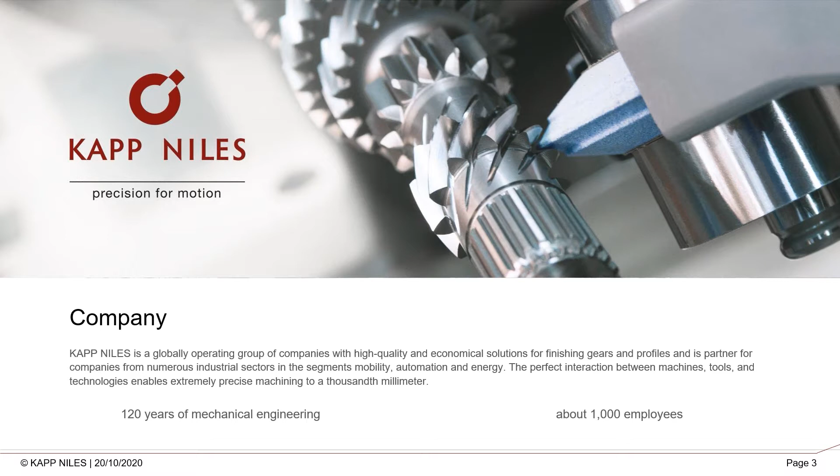KAPP NILES is headquartered in Coburg, Germany, with a plant for the machines and a separate plant for CBN tools and dressers. There is another plant in Berlin for machines. We have a third plant at Grossostheim for the measuring machines. We have subsidiaries all over the world, with the latest being KAPP NILES India Technologies in Bangalore, with our offices in Pune and Delhi as of now.

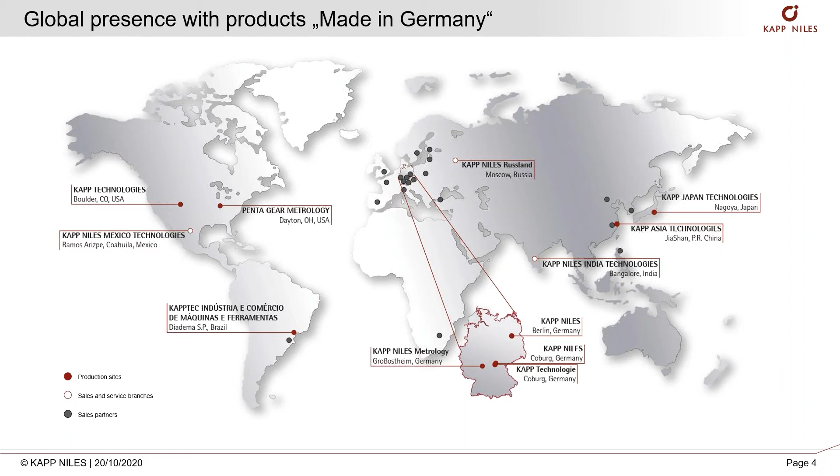We will now move on to the sectors that KAPP NILES caters to, and over the next 2-3 slides we will cover the types of components, which will give you an idea of the variety, the range, and flexibility of our machines.

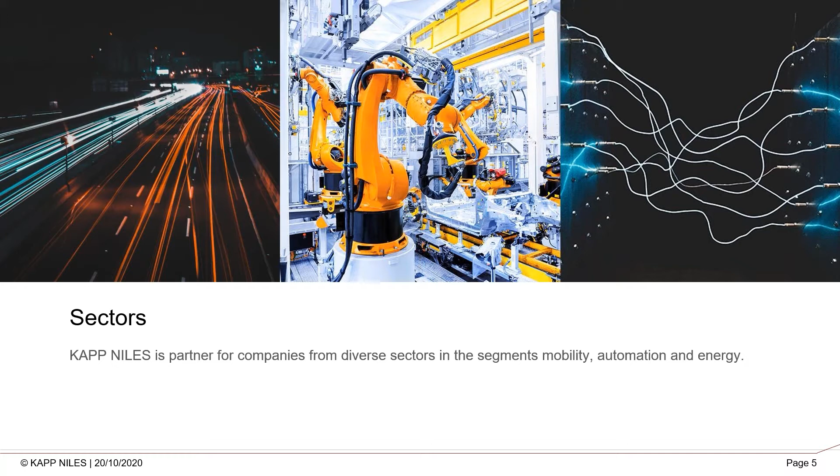The mobility sector clearly shows our strengths in automotive, aviation, and shipping. A few examples showcased here include gear shafts, ring gears, double wheels, and pump rotors in the automotive sector, while we have sector gears, triple pinions, input shafts, and double helical gears under aviation and shipping. Basically, anything cylindrical gear or profile part that requires grinding is almost possible on our machines.

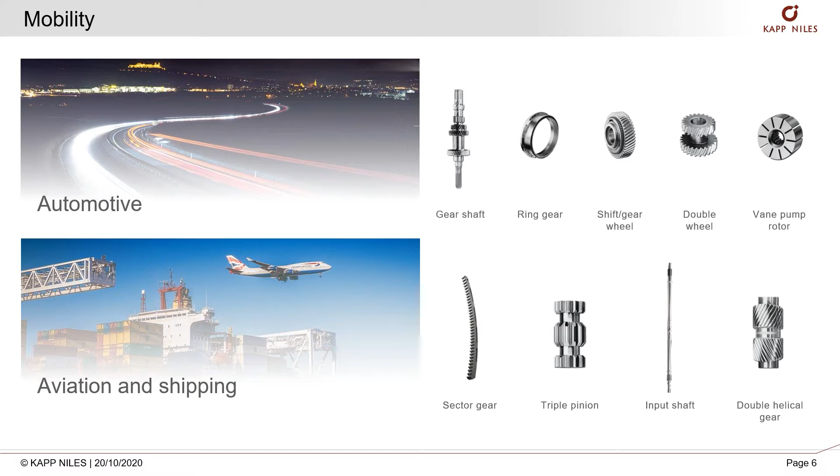Flexibility being our focus, we cater to parts like cycloidal discs and ring gears housing for robotics, and all kinds of gears, worms, and drive wheels for conveyor systems and industrial gearboxes.

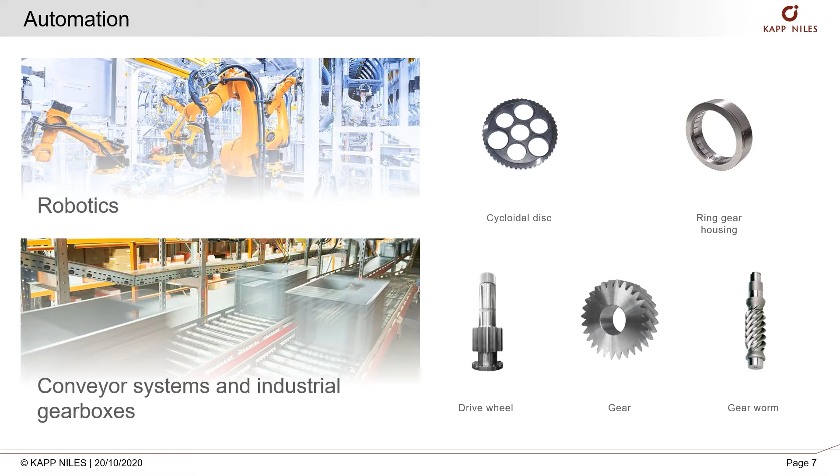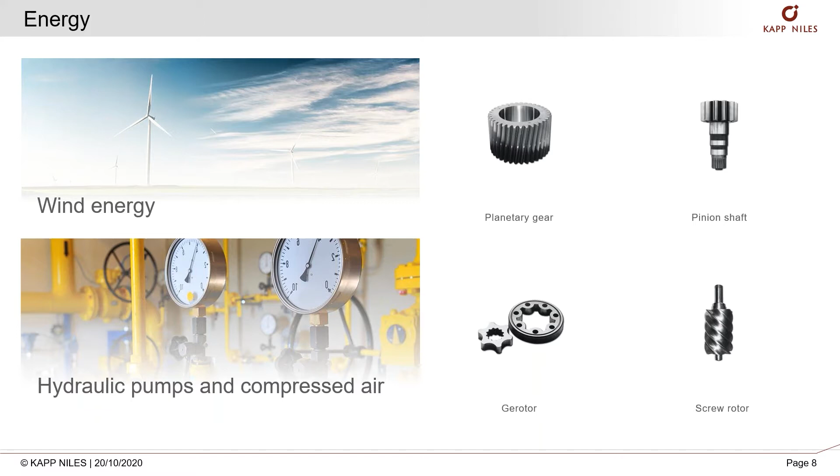We don't just stay small, we go big as well. Wind energy is a very interesting sector for us, with planetary gears and pinion shafts. Besides that, in hydraulic pumps and compressed air sectors, we do gerotors and screw rotors, to name a few. As you can see, we are not limited in any sector, be it external or internal. We grind the parts wherever possible.

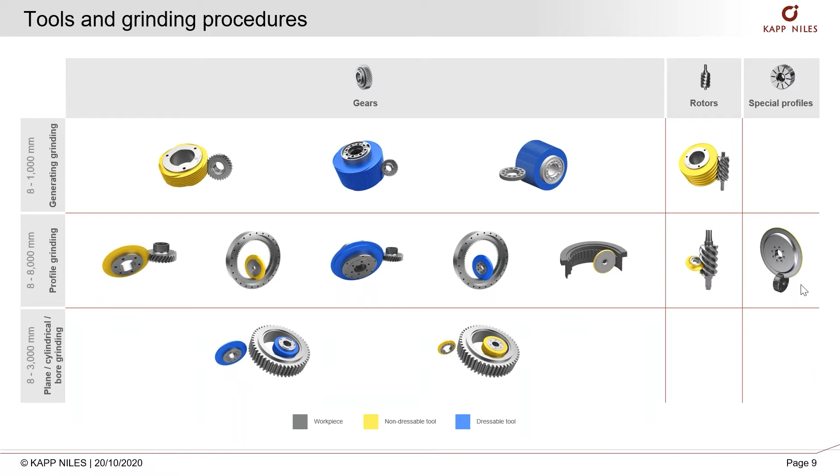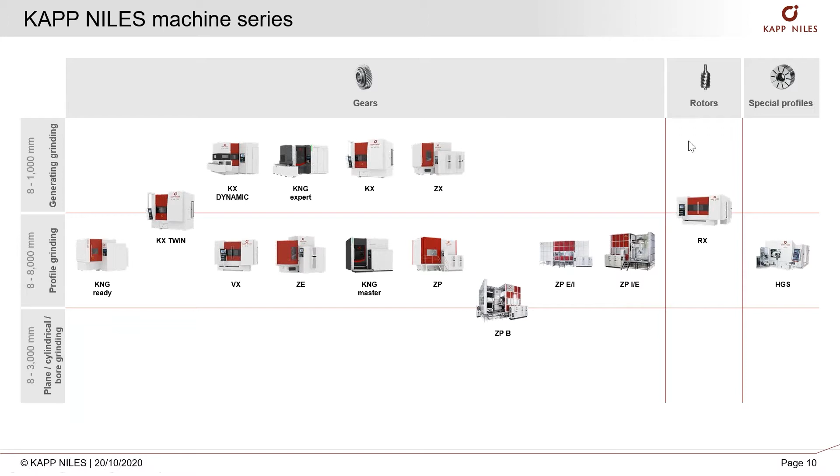We cover all the ranges as explained, right from generating grinding up to 1 meter diameter, profile grinding up to 8 meters, and special plane cylindrical or bore grinding up to 3 meters. All our machines can take CBN and worm wheels. This is just an overview which covers all our ranges of machines.

All the tools you see on this page are manufactured by KAPP in-house. This includes also rotor grinding and special tools. This is a big advantage for us as we are able to control the process completely, and due to our experience in the field, we are able to achieve the high tolerances required in the industries.

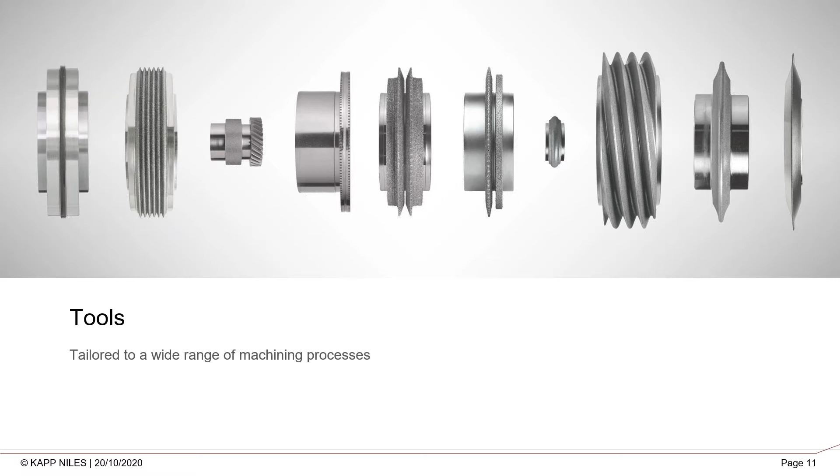This slide shows you the different types of grinding tools and dressing tools we have in our program. The gear honing machine is not part of our program, but the tools we make are supplied to customers for this type of application. We have both the dressable and non-dressable grinding tools as well.

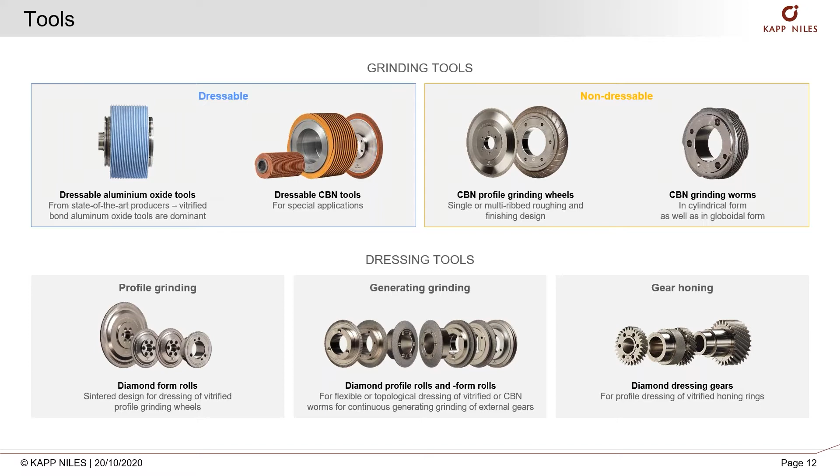We will now talk briefly about topological generating grinding, which is gaining a lot of focus of late and also being widely used in the electric vehicle markets.

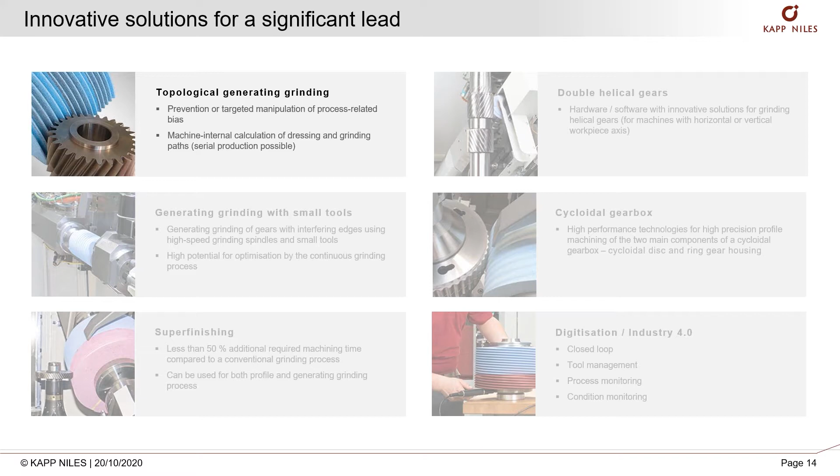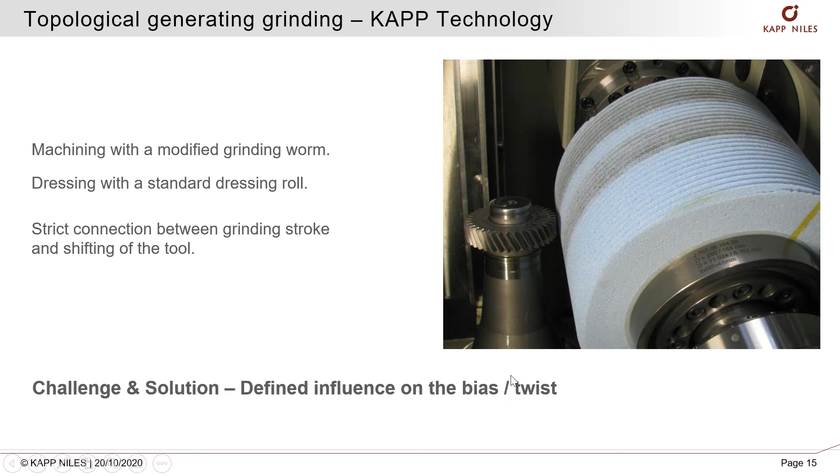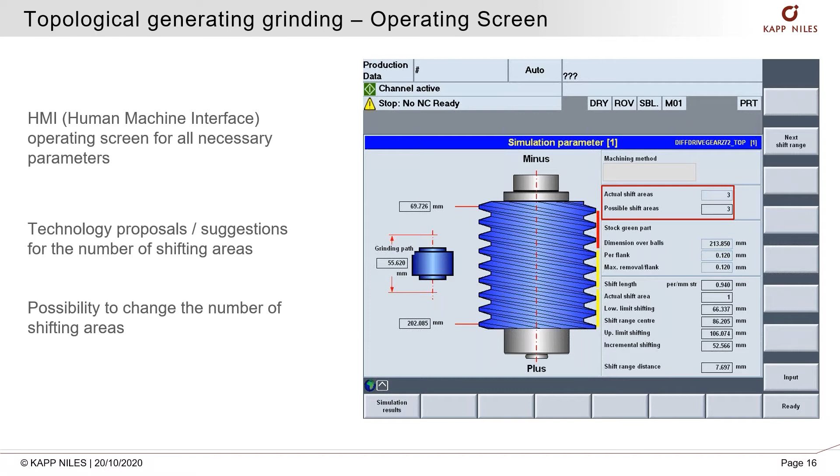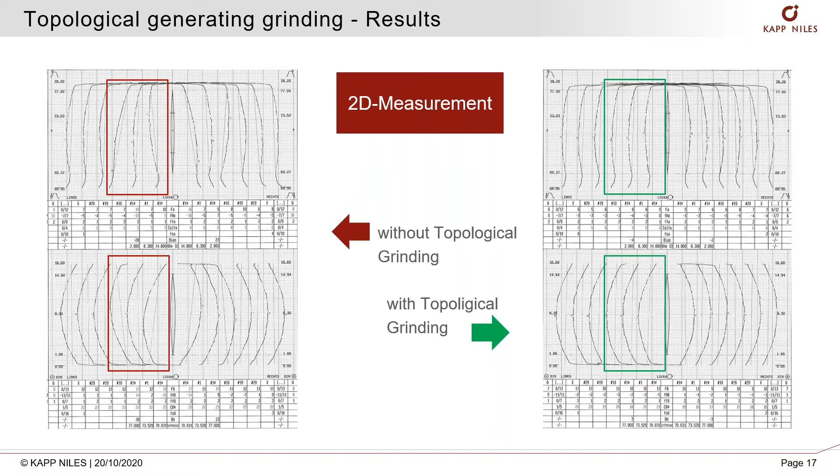Moving on to generating grinding with small tools. This specifically requires high-speed grinding spindles, especially critical when it comes to two interfering gears on the same shaft, for example cluster gears. The next few slides I will discuss this in more detail.

Here are some examples of the small tools which we use on our machines where we do generating grinding. Spindle speeds of 23,000 RPM. We have automatic balancing on them, and changeable tool holders with the same interface. These workpieces are available on certain models of our machine doing generating grinding.

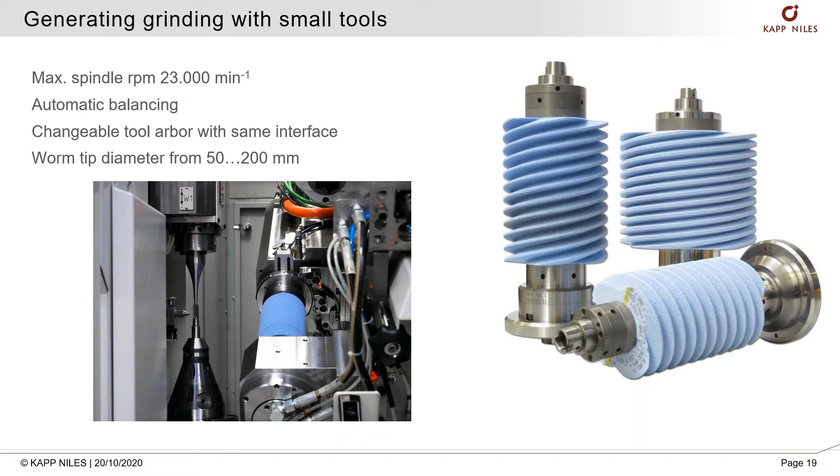Here is an example of a cluster gear. We use a bigger wheel for the bigger part and a smaller wheel for the smaller part, but not in the same clamping.

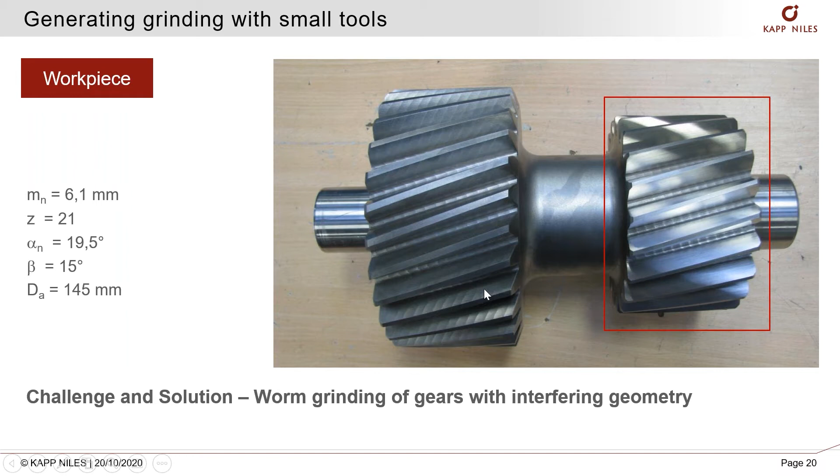The tool used here is a 30% SG wheel of 150mm diameter with 4 starts. For the bigger gear diameter, we use a standard 280mm wheel, whereas when we come down to the smaller gear, we have to change over to a 150mm diameter. This way we do not risk any collision between the two gears with a bigger wheel. Secondly, with a bigger wheel trying to do the smaller gear, we have to do profile grinding, whereas with a smaller wheel we're able to do generating grinding.

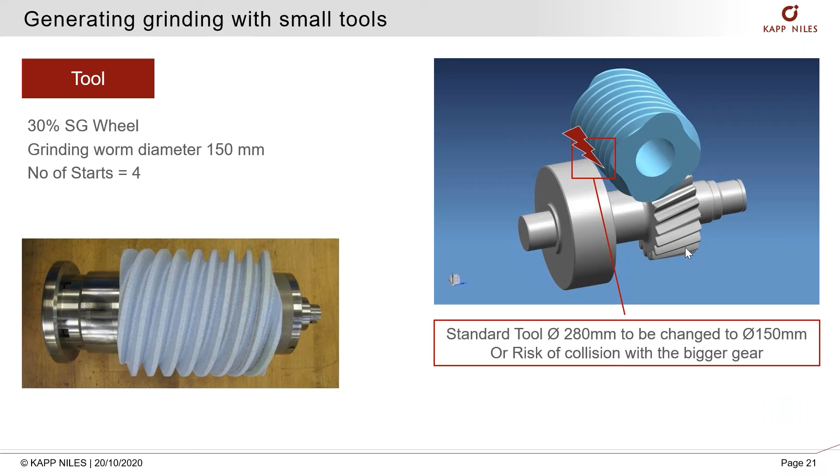Here you can see the setup with a smaller wheel. The former technology of using non-dressable profile CBN grinding wheels, with a grinding time of approximately 5.4 minutes, is now replaced with a smaller dressable worm wheel with grinding times of approximately 2.9 minutes. So from this you will see that we are able to achieve approximately 46% higher productivity with generating grinding, with no longer profile grinding required. This is a big benefit, especially for such types of components.

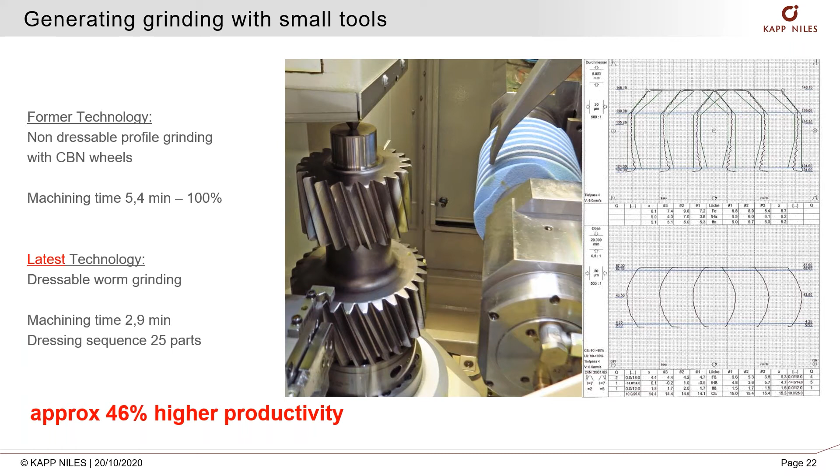We will now talk a little bit about superfinishing in the grinding process for both generating and profile grinding. The wheel, as you see here, is a sandwich wheel. The yellow marked area is the grinding area, and the red marked area is the superfinishing area. In other words, the blue wheel is the grinding wheel and the pink wheel is the superfinishing wheel, which are sandwiched together. The requirement of such a setup is specifically for high surface quality achievements, for example, as we say here, Ra less than 0.1.

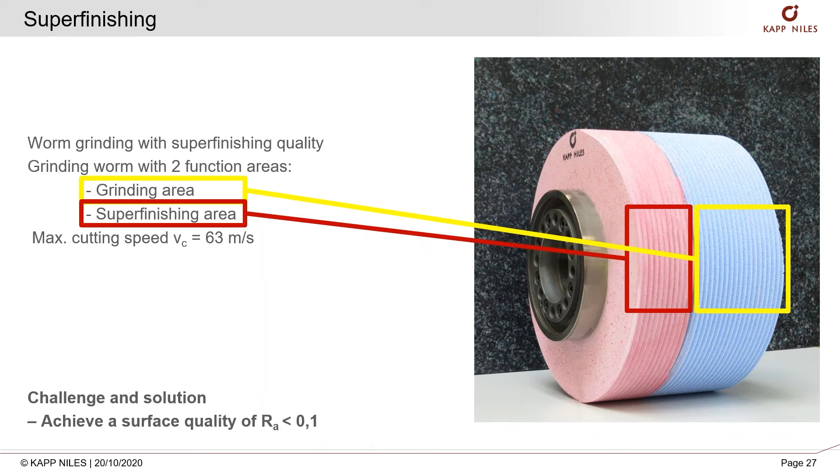Let me show you the difference between the same gear. On the right side we have the part after grinding, and on the left side here we have it after superfinishing.

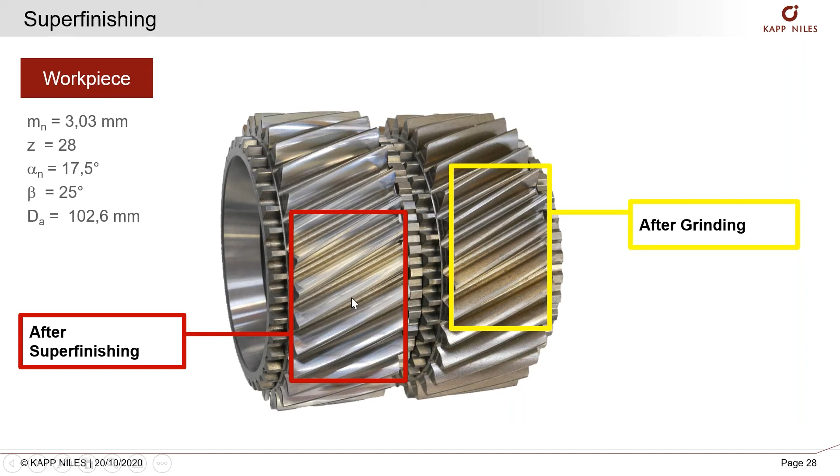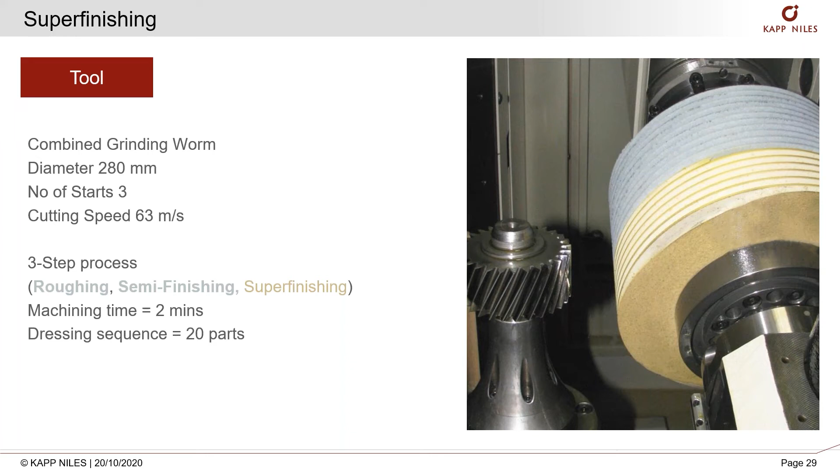Here the measurement sheet shows you the accuracies that we are achieving. On the left side, before superfinishing, and on the right side, marked in green, after superfinishing.

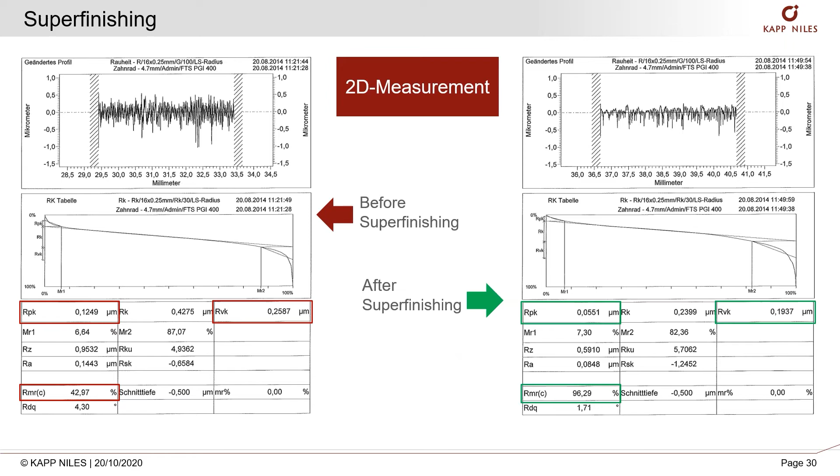Over the next slides I'm just going to run you through some examples because we are running a little bit into a time factor also. So we'll just show you a few slides about double helical gears, that these are also possible on our machines - the grinding of both lead directions in one process.

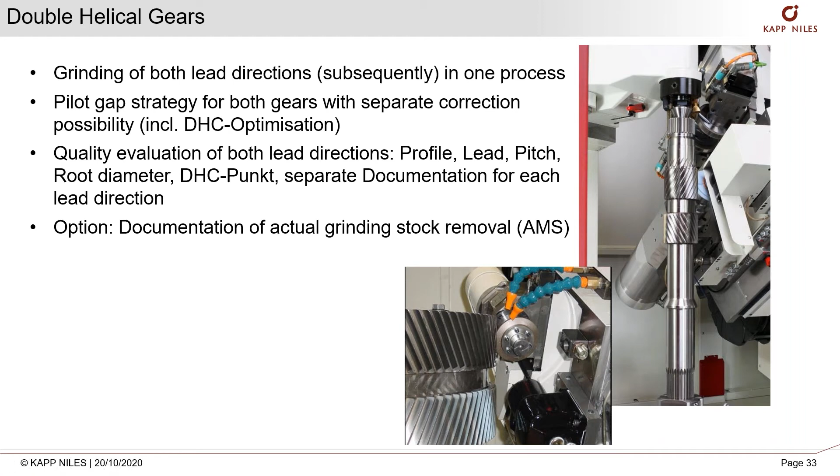As you can see here, for this we do have special software aligning the gear to accommodate the apex point. We distribute the stock across all points, and all gear points are ground within the required limits. We have the option of filling in the minimum and maximal stocks, and considering the grinding stock and apex point, this is very critical, especially for aviation type parts.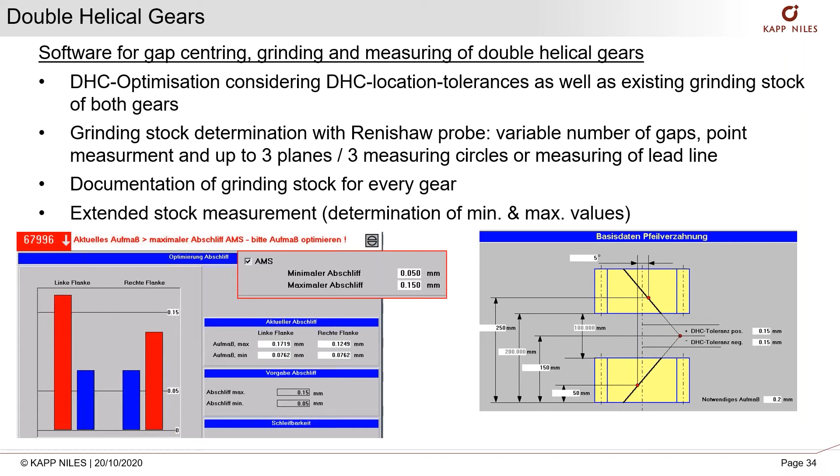Some other options we offer are planetary gears, where we are able to do cylindrical or tapered bores, faces, external diameters, internals - this is all the flexibility of our machines.

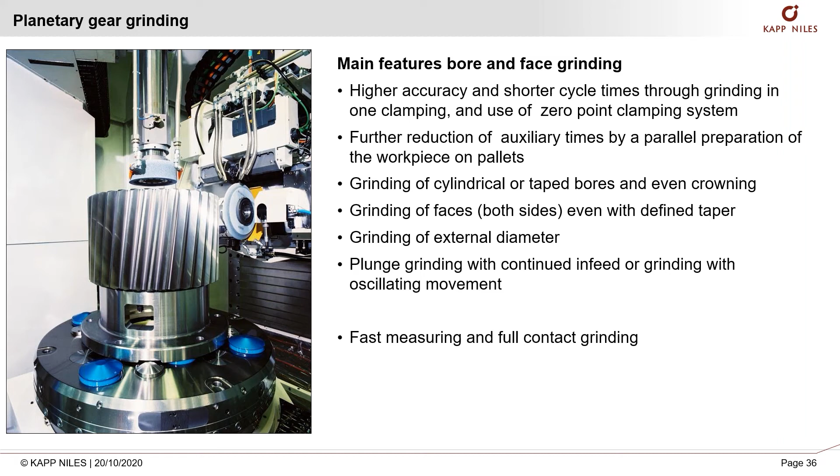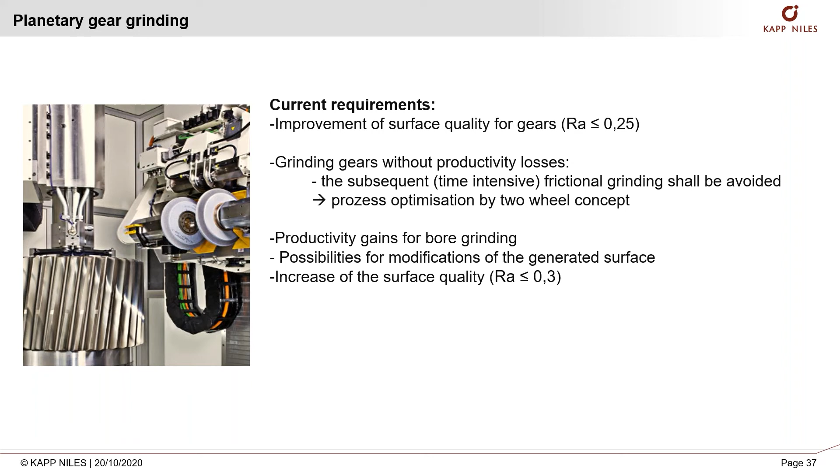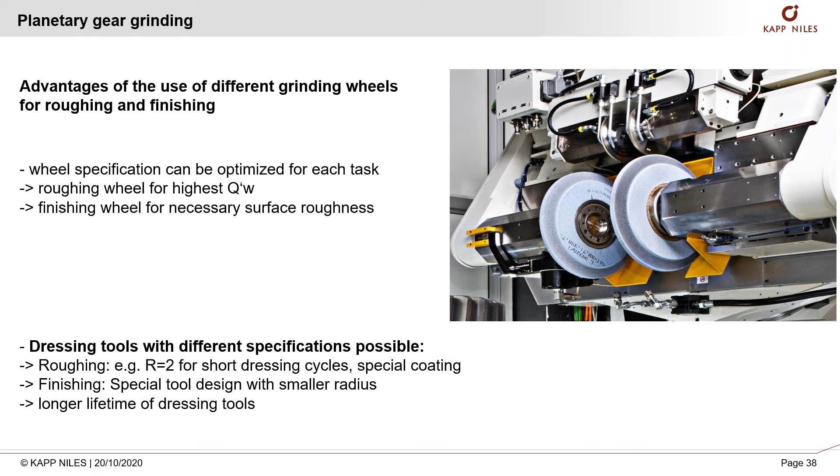We are even able to use two wheels for roughing and finishing, and you can see this over the next slide as well. We are also able to do internal ring gears, going up to even 3 meters or more.

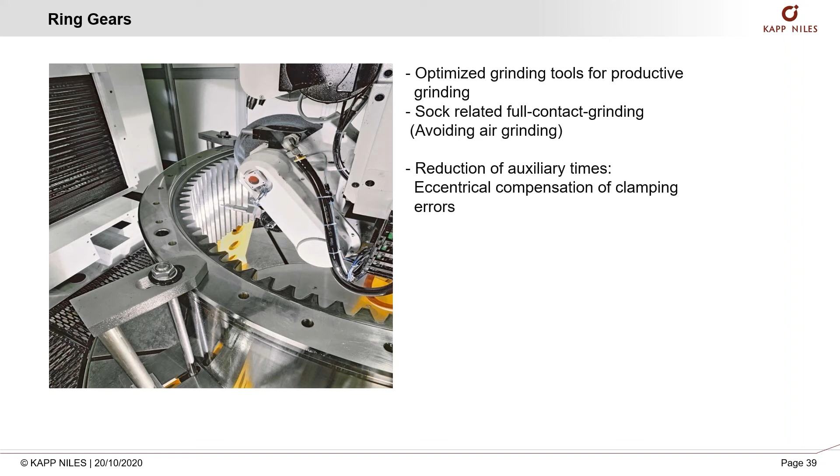I now come to the part of the closed loop: tool management, process monitoring, condition monitoring, basically a part of our digitization or Industry 4.0. KAPP NILES is definitely ready in this direction. The next slides will show you a bit of this for your information.

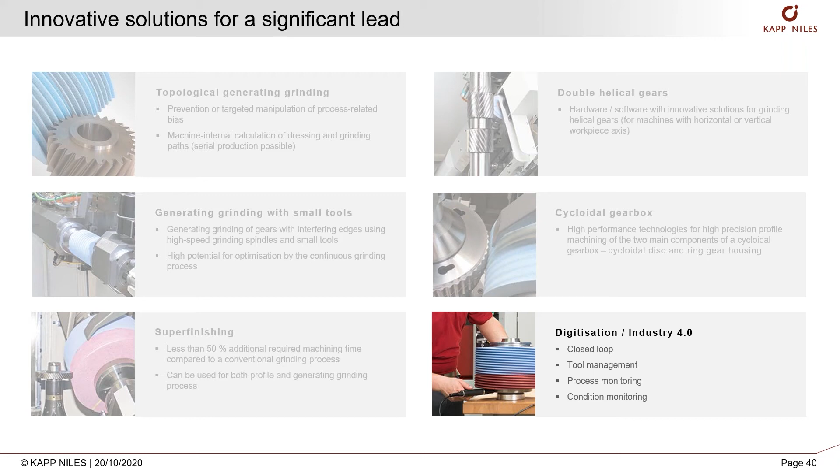The KN grind, a closed loop offered by KAPP NILES, was also shown at the last EMO last year. In the closed loop, it is between the grinding machine, which through secure data transfer through software and QR codes, we send the data to the measuring machine. This in turn calculates or measures the workpieces and exports through the GDE to the machine software, which automatically corrects the requirements as per the defined rules.

The user can input the defined corrections of, for example, FH alpha, FH beta, tooth width in advance and confirm it to be done automatically.

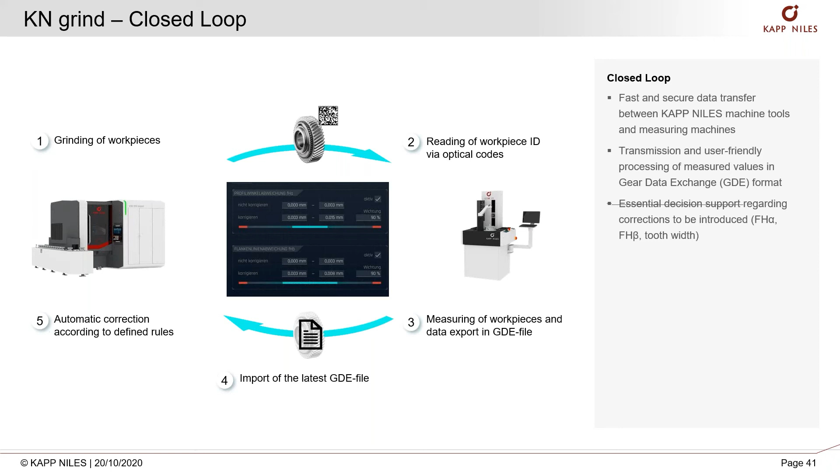Now here you can see on the screen where all this can be entered even manually, and the range is set, for example, for the profile angle deviation, for flank line deviation, and deviation base tangent lengths. Here, for example, we give a range between which no correction is required. If it falls within the following range, then we can give a percentage of what needs to be corrected, for example, 90%, 100%, or 95%. This is available for both flanks, left and right.

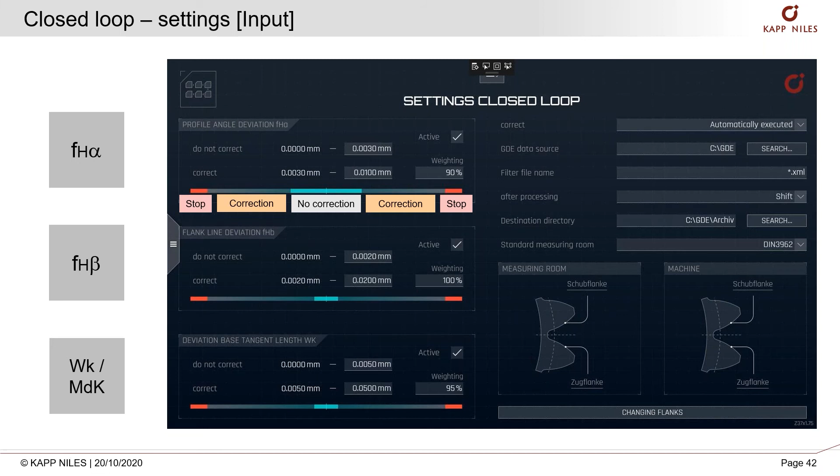After that, here you can see the output or display as shown on the screen after the process goes on and the correction is taken. So this is all on the screen of the machine.

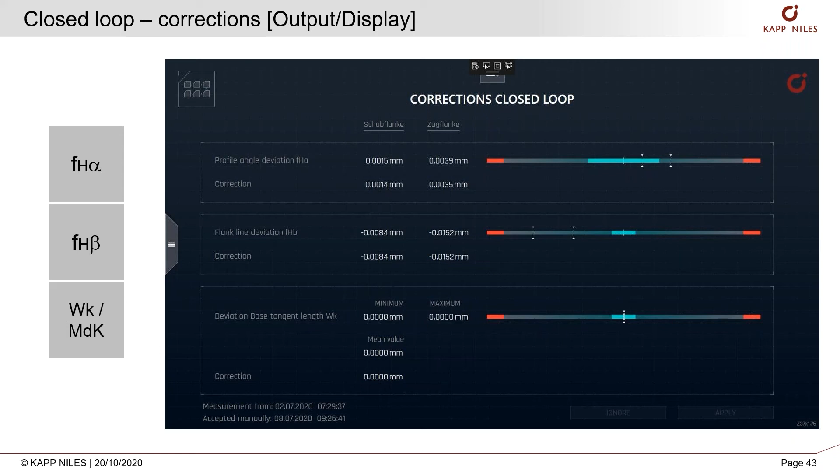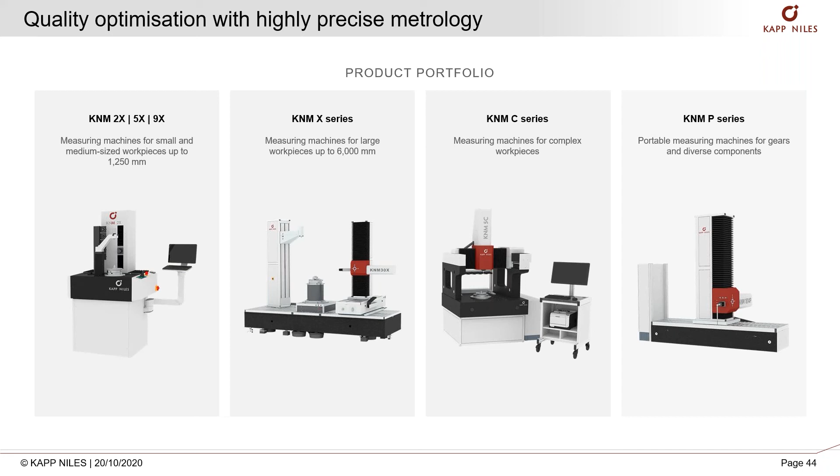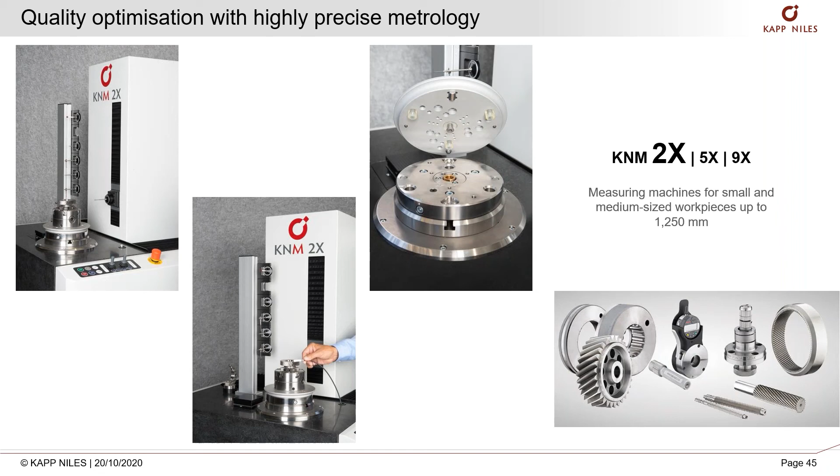The next few slides, I will just show you some of the clamping situations of the measuring machines and some of the parts that can be covered also. This is one of the smallest machines that we have, the 2X. We have tool changers, multiple measuring options, clamping situations. Here you can see the different types, just as information, some gears. We go big as well, going up to workpieces in the range of up to 1,250 mm. We do also have machines going up to 3 meters or more in measuring.

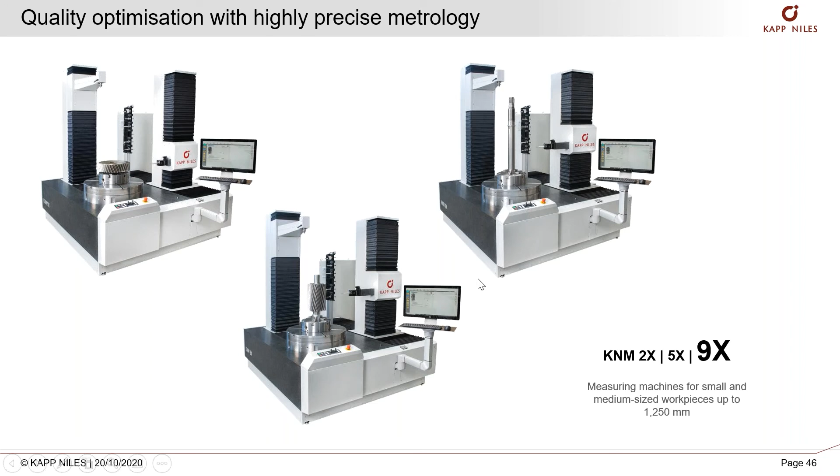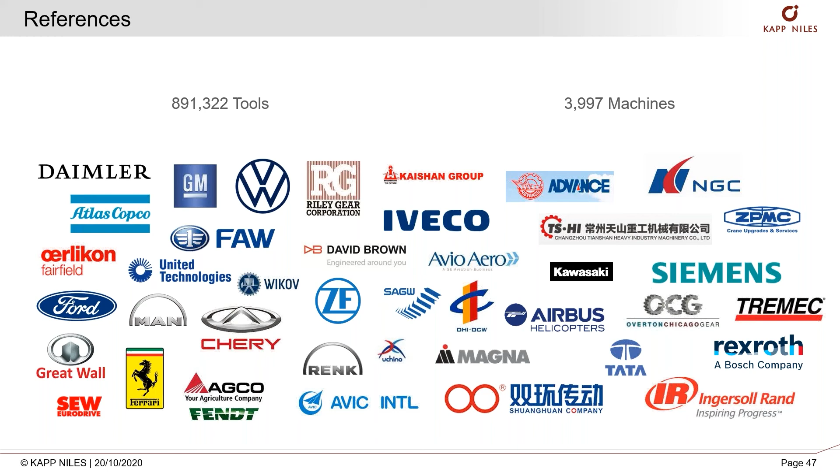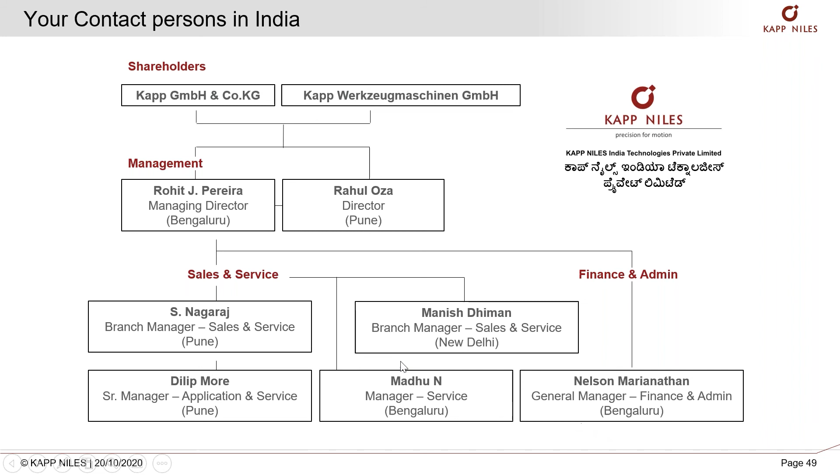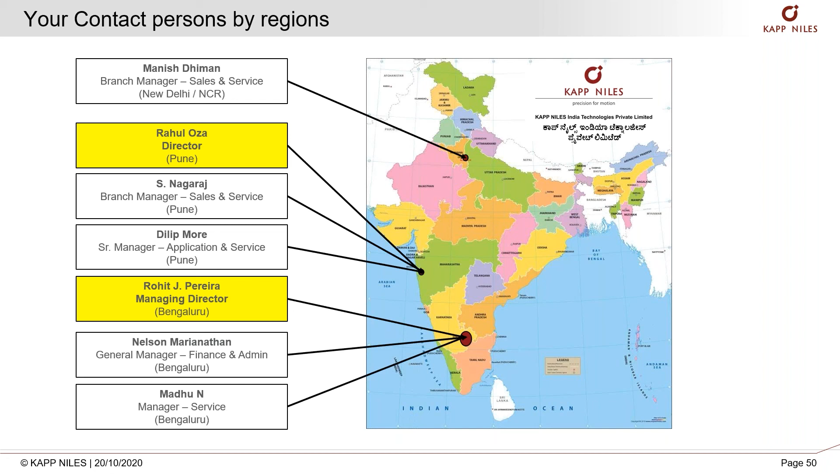Just to give you an overview, the shareholders of KAPP are KAPP GmbH and KAPP Werkzeugmaschinen. That's me, the managing director in India, together with a director in Pune. We have sales and service across Pune, New Delhi, and Bangalore at the moment. So in this way, we are covering quite a bit of the south, the west, and the north. As we get more requirements and more to do, we definitely will be increasing this as much as possible.

We are ready for new challenges. Are you ready for new challenges? Do contact us for any query and we would be glad to assist you.